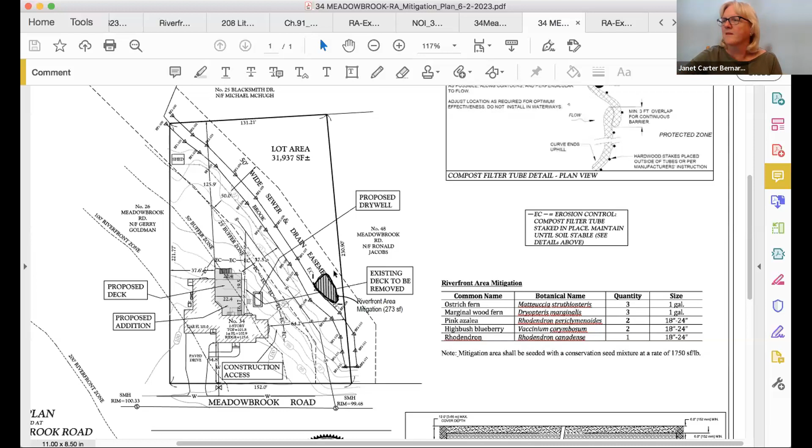May I share my screen? Yes, you may. This is a continued notice of intent, by the way. Okay. Can you see that? I'm not always good at these things. Oh, I have to move you guys over. Everybody else can probably see and I can't. Is it on the screen? It is. Okay, it just took me a minute. That's that part.

I'm Susan McArthur from McArthur Environmental Consulting, and I'm here with Brett Reese, the homeowner and applicant for 34 Meadowbrook Road. At the last commission hearing, the commission had requested that we provide riverfront area mitigation for the proposed impacts to the riverfront.

So we've come up with a mitigation area. It is located on the opposite side of the brook. It is a grassy area with just some fringe shrubs and whatnot. It's 273 square feet, and we're proposing 3 ostrich fern, 3 marginal wood fern, 2 pink azalea, 2 high bush blueberry, and 1 rhododendron. It's a little shady over there, gets a little bit of sun, but we think those will do fine in that area. Prior to installing that, we're proposing just an erosion control barrier because it's close to the edge of the brook.

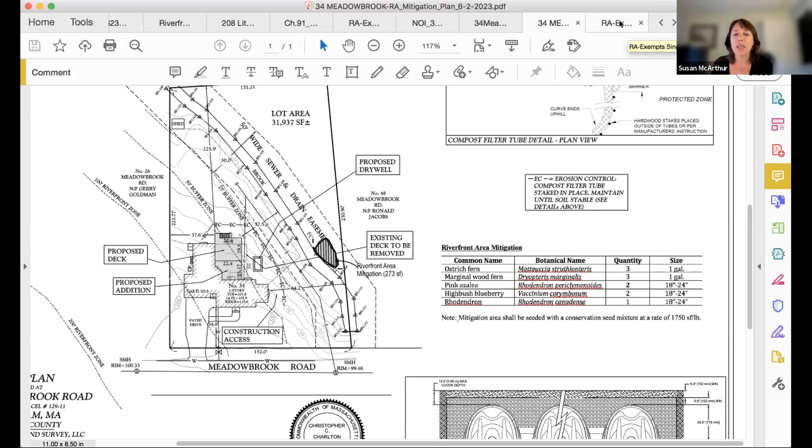So I just wanted to make the point that it's only 35 additional square feet of new area in the riverfront. I know you all attended a workshop with the DEP, but I think something's a little, well, we're doing the mitigation.

Don't get me wrong, but I'm just pointing that out, that I think maybe the way it's interpreted is different. I also wanted to show you this memo I found from the DEP, which I highlighted. It's about the Rivers Protection Act, and it does say existing structures such as single-family homes and accessory uses are exempt from the Rivers Protection Act. So I'm just pointing it out to you. You might want to talk to Alicia.

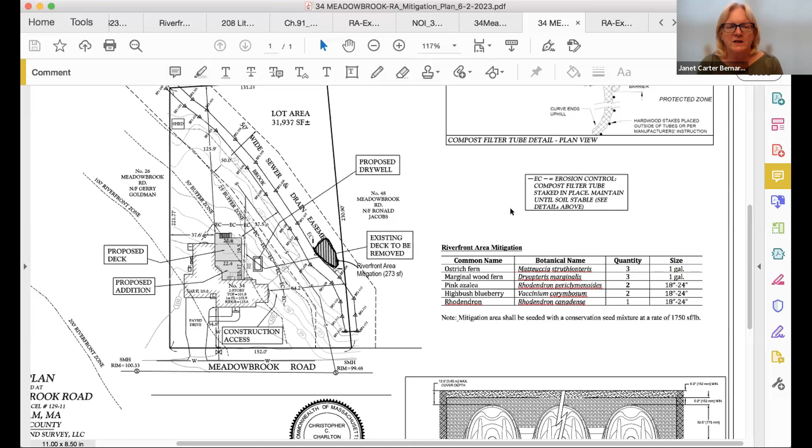Yeah, we did. We actually had an email with her that backs up what we're saying. Thank you, and we will keep that in mind because there are others on this call who have had the same question. We've gone back and forth with DEP a number of times at this stage, because every meeting we have the same conversation with, not you, but others as well. So we hear you, and this is what we're being told. We appreciate you providing the mitigation, and we also really appreciate that you're outside of the 25-foot buffer zone. I'm just pointing that out because there are others coming right behind you that may not be.

Okay, so do we need anything else for this application? Are we ready to close the hearing? If so, I'll take a motion.

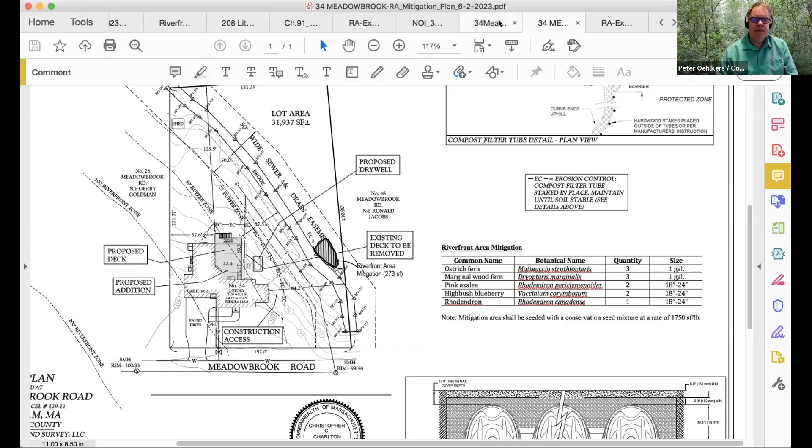I move we close the hearing. Second. All in favor: Peter, aye. Allison, aye. David, aye. Sue, aye. Great, thank you very much.

I think we will be discussing the order of conditions for that later on this evening. Okay, thank you very much.

So now we're moving on to 46, 50, 62, 94 Heather Lane, MWRA Siphon Structure Project, DEP file number 234903. This is also a continued notice of intent.

Who do we have to talk about that? Good evening, Milan Horbaczewski, MWRA, and we also have Mike Cunningham with Kleinfelder. Thanks for having us back tonight. Yes, this is the continuance of basically a discussion on our existing easement running through the back of those properties.

Thank you to Deb for getting some additional contact information for us. I had a conversation with Simeon Bruner of Bruner Cott, which is the property owner at 46, and was able to discuss with him the project and what it is that we intend. I also shared with him the drawings so he has a good feel for what we're doing there. He's not interested in any additional trees being planted on his property. So I think at this point we've exhausted the ability to plant in that area on private property, outside of our easement.

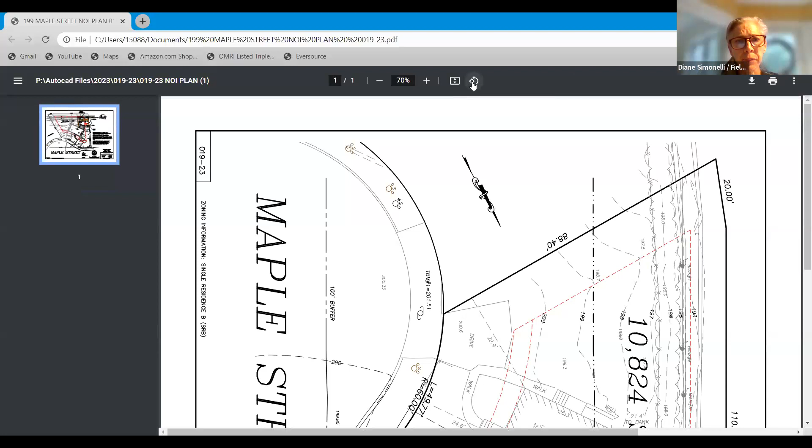Again, the wetlands were delineated by Karen. It's an armored drainage ditch. I don't know if you can see it, but the armored bank is here. There is an existing fence that has some vegetation between the fence and the armored bank.

And currently it's all lawn on the upland side of the fence with an existing shed that's currently within the 25. I know there's been some concern about work in the 25, but this particular lot is unique in that it is a two-family.

I know the lot itself is 10,824 square feet, but exclusive use for this particular lot is only 5,140 square feet. So the lot itself for this homeowner is very tricky to work with, in the sense that this red dotted line is the building envelope for the lot.

Again, they have a sunroom. It's going to be sitting on sonotubes, and technically the only portion of the work that will be in the 25 is one sonotube, which would be in this corner. The proposed project does include removing the shed and replacing it outside of the 25.

So technically, in this particular project, we are reducing structure within the 25. The calculations we did are based on the structure, but technically it's only one sonotube that will have disturbance within the 25-foot no disturb. So technically, I believe we're reducing - let me just slide this over a little bit more.

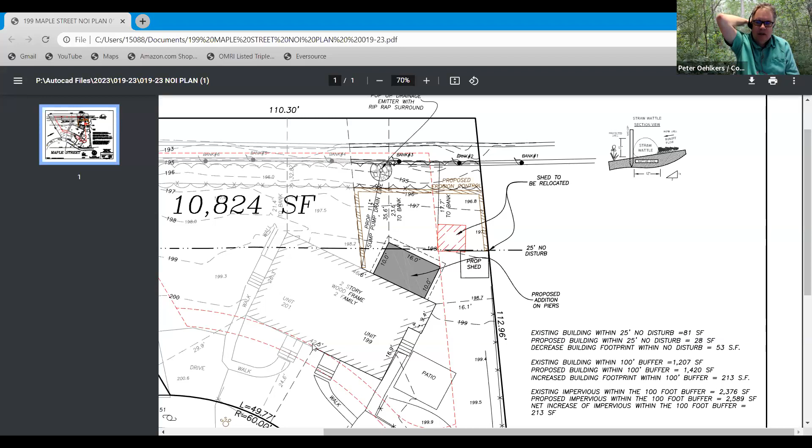I echo Peter's comment. But I have another comment about this drainage line. That's construction in the 25-foot zone, and I don't think that's allowed by our regulations.

Secondly, there's no drainage shown from this addition. My understanding of our regulations is that...

It should be infiltrated on site, no matter what size it is. It doesn't fall under the Needham stormwater bylaw, but our regulations do say that stormwater, or runoff from any new impervious area, should be infiltrated on site.

So this appears to be like a covered deck type of structure—it's a 1-story structure, right? Correct, yes. And again, the reason for not infiltrating is because of the groundwater—basically you'd just be circulating the groundwater.

It's going from the roof runoff into an infiltration system, which we could easily do, but it would just get pumped back out by the sump pump. So it's just a constant cycle, and that's what we're trying to help the homeowners with—a wet basement.

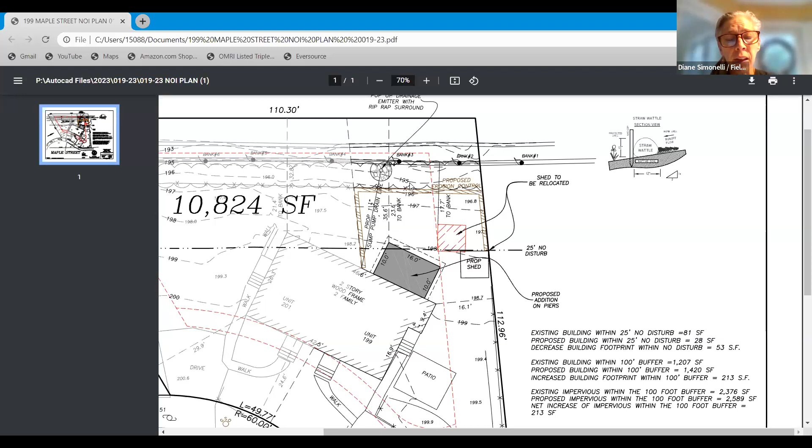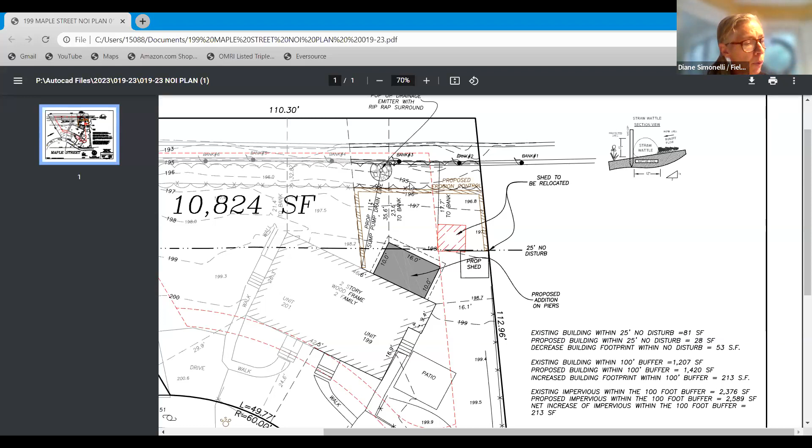So that is also in the packet—let me just grab that. Again, trying to increase the natural habitat of vegetation in that area, though we don't want to propose any plantings until we get a handle on the invasives that are currently there.

You're not taking any trees down though, right? No, no trees are being removed. So we have some buckthorn, bittersweet, jewelweed, and multiflora rose that we'll be removing—I'm sure that will surprise you, the jewelweed.

That seems—is that an invasive, Allison? Yes. Oh, I think it's kind of pretty. It's good for poison ivy. Jewelweed? Oh yeah, you rub the sap on your skin. Nothing likes it better—it likes a wet place.

Yeah, but I thought it was just a wetland plant—I didn't think it was an invasive wetland plant. It grows like wildfire. I don't know what you call invasive, you know—one person's diamond is another person's piece of glass.

Whenever I see that, I know it's a wetland. Yeah, me too—that's one of my things that I know. One of your go-tos. One of my go-tos.

Allison, you have—oh, Dave, are you finished? Yeah, okay. Allison? Yeah, I had some questions. I had the same questions about digging in the 25, even if it's one, you know...

...footing, or sonotube—it's still in the corner of the deck, it's still in the 25, and also the pipe. But I'm trying to understand when you're talking about how this wall stops the groundwater from moving down. So my question is, what is the elevation of the basement?

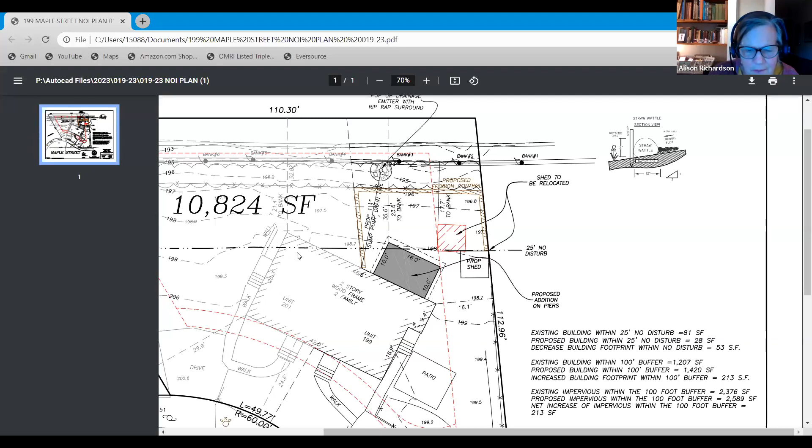I don't have that elevation. We didn't get the elevation, but it seems like the elevation is about 200, going around the building at the front. And the elevation inside looks like it's around 200 as well.

And the elevation in the stream, the armored stream, is like 193. So this 194 is the top of the wall. Oh, at the top of the wall. Okay, yeah, it's easily 2 to 3 feet—easily 3 feet. So I was wondering if this is maintained by the town, right?

If it really is holding back the groundwater, I don't know. But if it is, why couldn't one drill some weep holes through the wall to allow the groundwater to seep into the channel? I'm just talking about something very simple.

If that's really a problem, that might help. We actually thought about that for the sump pump too, but we weren't sure if that would be allowed. I don't know if it would weaken the wall.

I'm just talking about a few weeps, like 8 feet on center, down below wherever it seems to be backing up to. The best thing would be to have it above the water level, but even below that might help.

If this is a town structure affecting the basement of this house, it seems to me one could go to the town and have a trench drain or figure out what could make the situation better without drilling through the wetland and putting drainage structures in.

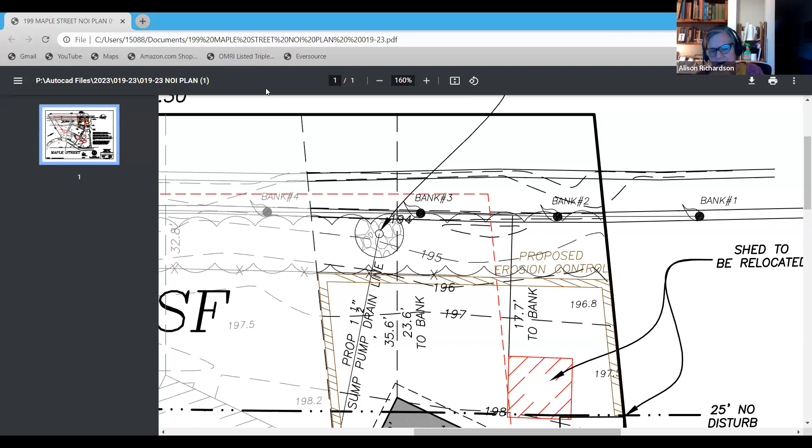I'm not just saying it from the point of view of a conservation commissioner, but if you really have water in your basement, there may be multiple ways to head it off rather than just having a sump pump. Well, currently they do have a sump pump.

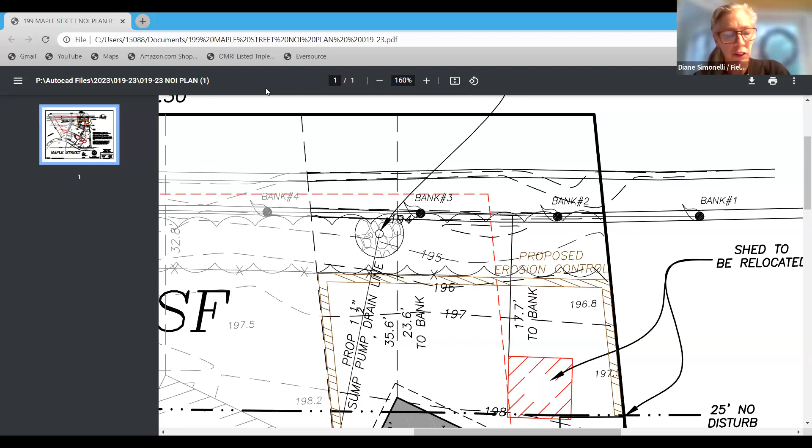Where does the sump pump go right now? Honestly, I'm not sure — do you guys know where the pump actually discharges? There's a discharge right now; the sump pump pipe discharges onto the lawn in the back.

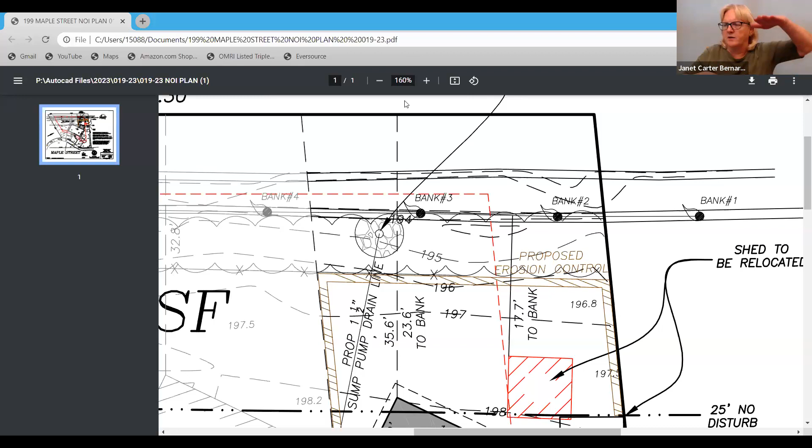It comes out right in the lawn, comes out from here on the house. I'm not sure — is that for both parts of the house or just the part we're talking about? What about the neighbor — do they have water in their basement too?

Yes, they do. They have a sump pump also — they have their own.

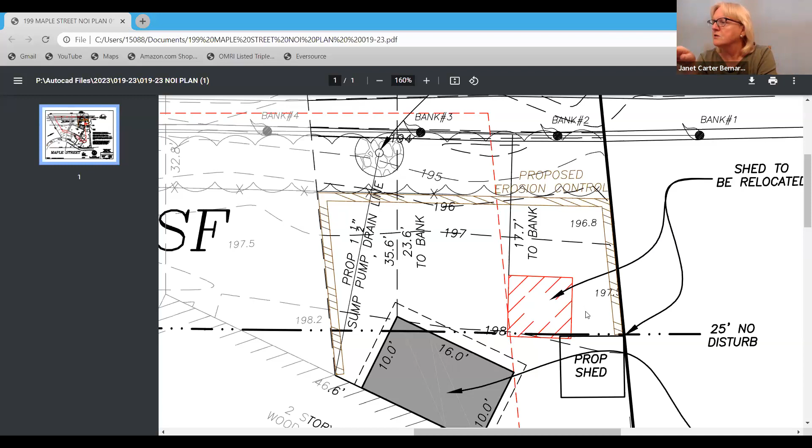Sue, did we get to you? No, actually, I do have a couple questions.

First of all, it looks like the sunroom you could pull back, so it's outside of the 25 foot. It looks like there's space on the existing house where you could pull it back outside of the 25 foot. I don't like to see it in the 25 foot.

That's number one. Number two, I am all for something in an infiltration system nearby the house for the new sunroom addition roof runoff. Third question is, if all this water is being drained back to the drainage ditch, what happens to the water level of the neighbors?

Well, this does flow into a culvert to the pond. It doesn't go to a specific neighbor per se. It's actually culverted, the house to the right of us, if you would. On their property, I believe it culverts right there, so it goes underground. How deep is this drainage ditch?

The top of the wall is about 3 feet higher than the bottom. It's concrete, basically like a three-sided box. Is the top of the wall flush with the ground? Pretty much, maybe an inch or two lower. So if it's 194, then the bottom of the channel should be around 190.

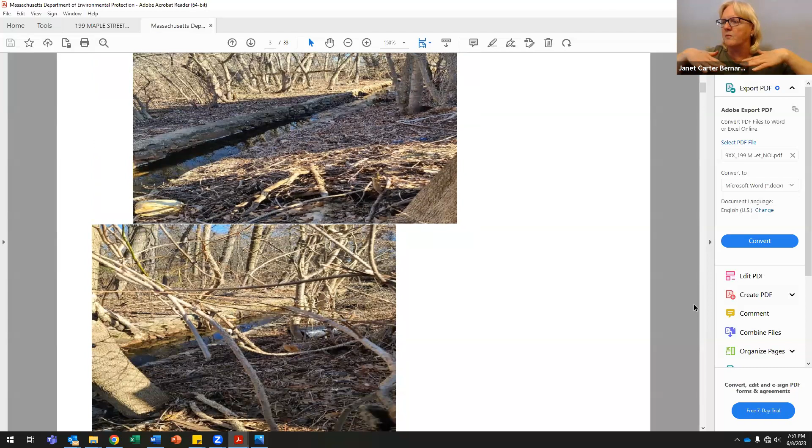The DPW just did some maintenance on this. Is this an area they did maintenance on? I don't believe so, this is behind the housing on the other side. This isn't behind the house at 199? Yeah, they did do maintenance over there last summer, we walked around and they cleared a bunch of areas, cleared some of the tree roots and saplings that were right on the wall because they didn't want them to interfere with the structural stability of the wall. Mike Redsky was part of that project as well as Tom Ryder, but they are the ones maybe to have the discussion with.

I'm also wondering, does it make more sense, instead of having your bubbler, to have the pipe just go right over the wall into the area, so you're not digging anything up.

For the stormwater management of the addition, would you consider a rain garden? It doesn't have to be deep, it just has to be a surface area, a small depression that you plant some flowers in and make a nice little rain garden out of. So it doesn't have to be a subsurface chamber system, it can just be a flower garden. I know the homeowners have a green thumb, so that's something we can discuss. They do a great job on the side of the house, it's beautiful, and in the front too.

And our rain garden is beautiful, do we still have that on the website, Deb? Where did Deb go? There's a neighbor on Great Plain Avenue that came in front of us because they were putting an addition on, and they could have put a subsurface chamber system in the front of the house, but they didn't want to dig up their flowers, so they ended up putting a good sized rain garden on one side, and she documented it for us.

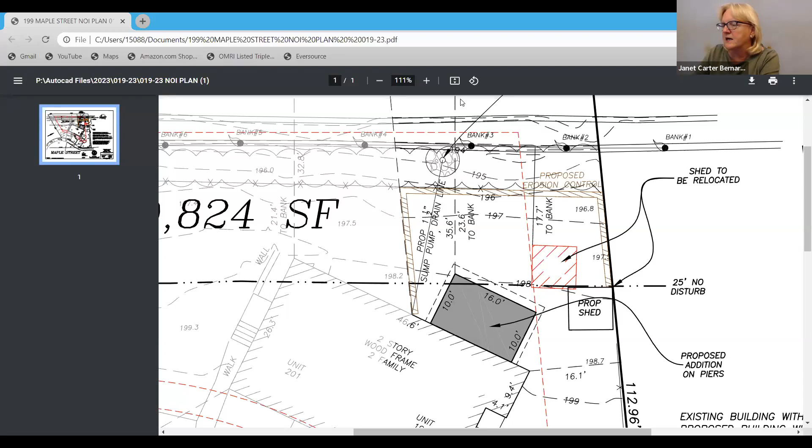Okay, so we're looking for an extension for DP, continuation of DP file number 234907, to June 22nd, 2023 at 7 p.m. Can I have a motion?

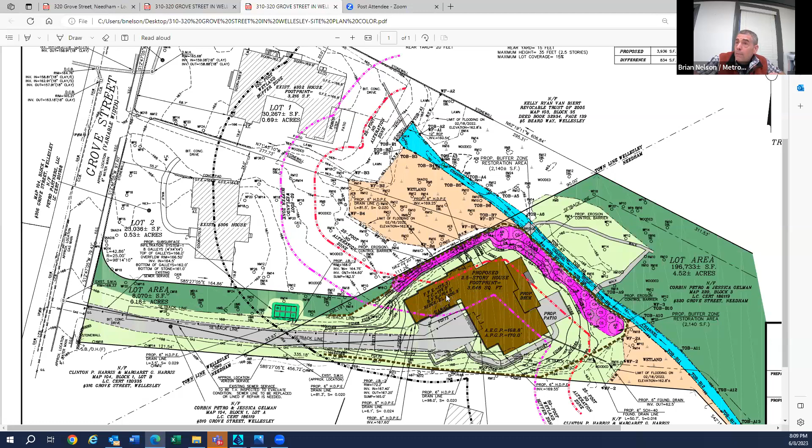But I would like to highlight some numbers - we go up to this table in the top right-hand corner. This is a table that we prepared just to show coverage within the resource areas. For the 25-foot, or what I'll call the no-disturb zone, existing impervious coverage of 2276 square feet, proposed that reduces down to 350 square feet. So it's a 1,900 square foot reduction, which is about 85%. Also looking at a 719 square foot reduction of impervious area within that 50-foot buffer zone, which is a 21% reduction.

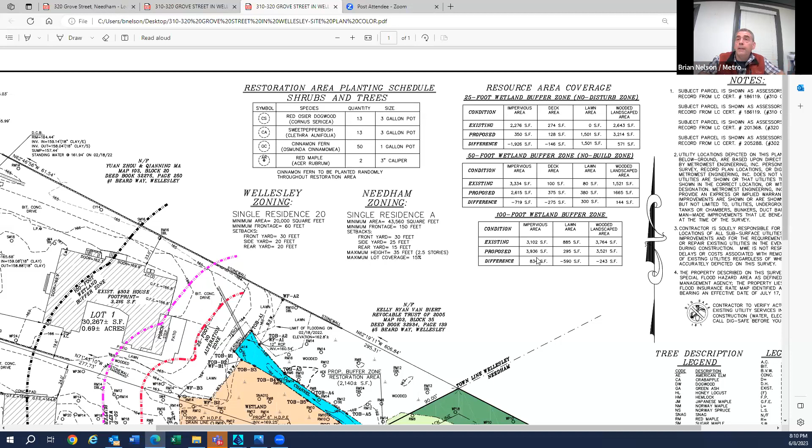We do have a slight increase in the coverage in the 100-foot buffer zone, and there is overall a reduction in impervious area of about 1,500 square feet. So we feel like we're doing the best we can to work within the confines of the lot, again constrained by a setback along the northerly side, which this new house is basically hugging. And it's hugging the southerly setback here. Again, that house has been pulled as far south-southwest as possible and rotated.

So the house floor elevation and foundation will be raised about 3 feet in comparison to the existing. Again, that's with the intent of trying to really make the house less flood prone, as the site is frequently inundated by floodwaters.

For stormwater, we have a proposed infiltration system that actually crosses over the town line, but we can tuck it in off the northerly side of the driveway over here. Again, just trying to get a system in that will capture and infiltrate roof runoff, and not really crowd the area out back - trying to keep that as far away from the 25 and 50 foot buffer zones respectively.

So the project will provide a stormwater management system. The project will significantly reduce impervious area within that 25 foot and within the 50 foot buffer zones.

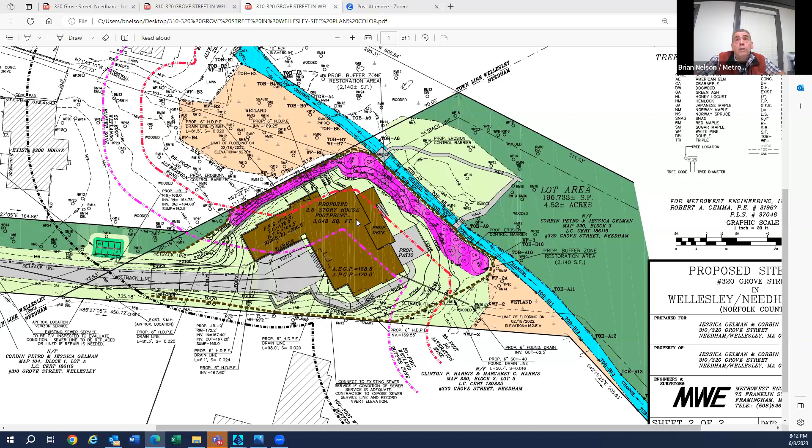And we feel that this house will allow the applicants to be able to live with a lot greater peace of mind in terms of being a little bit higher in elevation and away from that chronic flooding. What I'd like to do just before I turn it over to Corbin is show you a couple pictures of that backyard flooding.

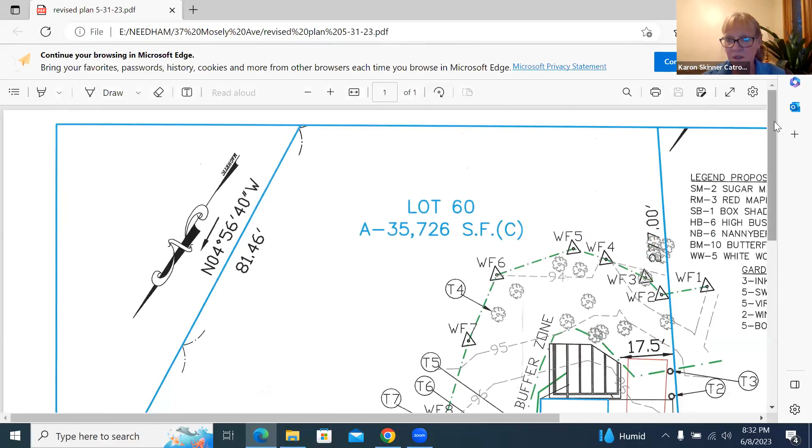So, revised, these are all the revisions we've had for this, okay, 5/31/23. This is the tree plan. This shows the colored version of the different additions that are going to be added, the plants, and the description of how the trees will be handled. We've pretty much covered all of that. Can you guys see that? It's not the whole screen, can you make it the whole screen? All right, here we go. So I kept looking back through the plans. Did the tree plan get in the package? This is the tree plan, and this was in our package, right? Everybody has seen this plan, I forgot to specifically look for this one. So this was revised as a colored plan, and we met with myself, Daniel, Mikhail, Janet, and Deb to discuss the calculations. There was some question about the calculations. Is everybody satisfied with that at this point? I believe we are satisfied with the calculation.

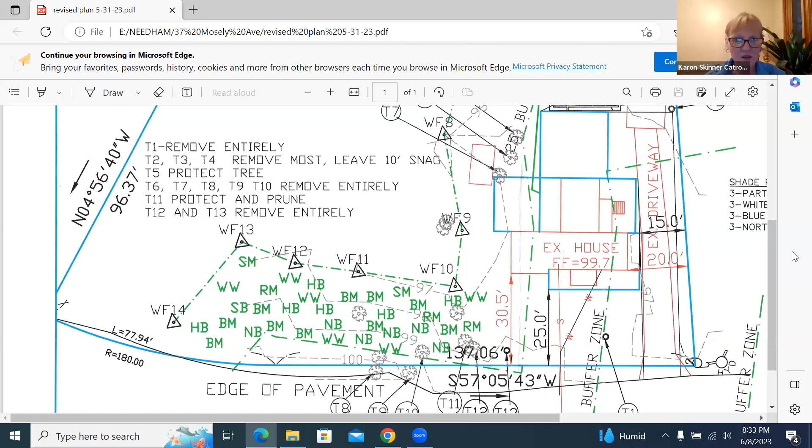Okay, so the other outstanding issue was the deck. The deck within the 25 is the only thing that we have now within the 25 foot zone. So they're proposing to construct a 10 by 15, or 15 by 18 deck, is that right? And it's coming out of, off of the 25 foot, it's within the 25 foot not-disturbed zone. So we have already discussed helical piers, so there'd be 2 helical piers within the 25. There'll be slots between so water can flow through. We did propose some plantings underneath the deck, shade tolerant ones. And the deck, is it going to be somewhere like 5 feet above the ground surface? I believe we did discuss that. Daniel, feel free to chime in. That all sounds correct, yes.

Okay, so those are really the only outstanding issues. Just to make sure it's very clear, you have an existing house that's within the 25 foot no-disturb zone that we are allowing you to keep, because you have said that is the intention. The other project was fully removing their house, totally outside of the 25 foot zone, so we're asking them to fully remove it. We don't expect this foundation to come down. This foundation needs to stay there. It doesn't get to come down.

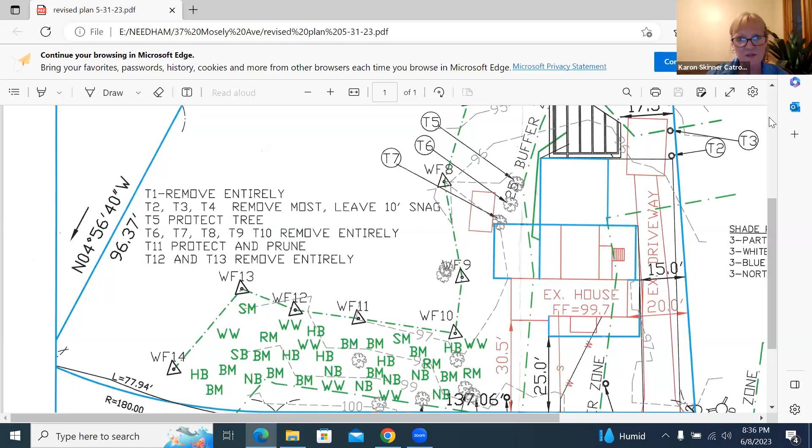Do you have a detail sheet? Clay, do you have a picture of that? I don't have that picture. I emailed all the photos directly to the Conservation Commission, along with the detail sheet, and the detail sheet was part of the plans, correct? That was part of the package. So what we're looking for is the soil detail on the plans, the sheet that has the details. It'll be sheet 6 of 9. Got it.

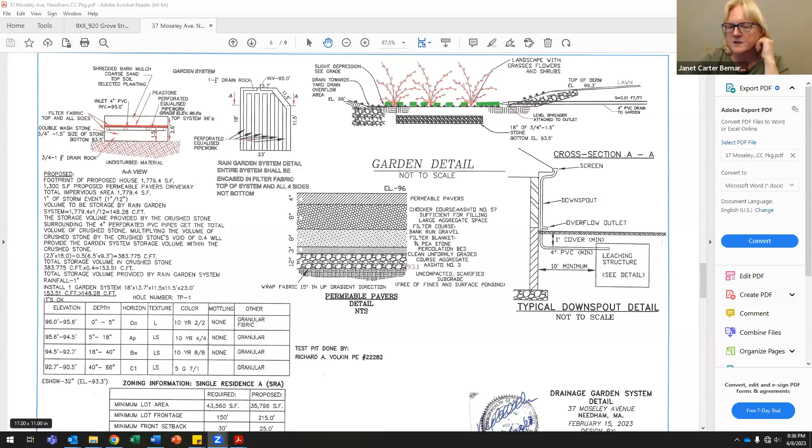So this is what the rain garden will look like now, for anybody in the audience paying attention. There is stone beneath the rain garden, shown at the top of this page with the flowers coming out of it. There's stone below, and 4-inch perforated pipes that run through the whole thing to divide up the water, like equalizing pipes. Then there'll be a compost topsoil mix on top of the pipes and crushed stone, and the plants will be planted in there. There was a planting guideline along the way. The water from the house will go into the pipes and be dispersed through the stone, feeding the garden flowers and plants above it. So it becomes a rain garden.

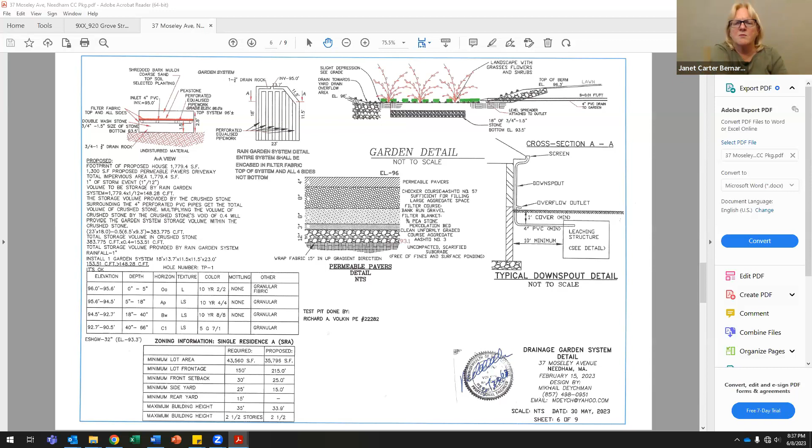So we had requested a clearer detail, which was understood, revising some numbers to make sure they all matched as they were supposed to. They were also going to provide a photograph of what this rain garden might look like, because there's also some stones, right? A slight depression that drains toward the yard, a landscape with grasses, flowers, and shrubs. Are those green stones, or are there also some stones going to be on top of this, I believe? Clay, do you see some photographs you could share?

Let me take a look. I apologize, there's a lot of materials to go through.

You actually did not send us the photographs. I did not, I never received the photographs, I just saw them in the office. I think they were part of that, weren't they, Daniel? I thought they were going to be, but looking at our package from June 8th, I do not have photographs in it. But I thought that was the idea, that they were sending them to you. They were definitely part of that email that I sent, there were 2 photos included in the body of the email.

Yeah, I've got them here. Just a moment while I pull those up.

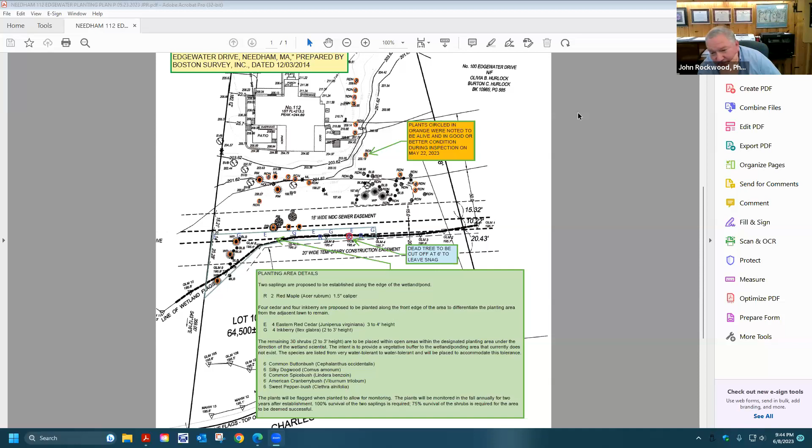Okay, now we only have 1191 Greendale Avenue, DEP file number 2347749. This is a request for certificate of compliance, and I believe you said it was in good shape. Yes, for Saint Sebastian's. I've been out there 2 million times and everything is good, so I would issue a complete.

Anybody have anything to add, or are we ready to issue a certificate of compliance for DEP file number 2347749? I'll take a motion from anybody. So moved. Did I get a second? A second. Okay, all in favor - Peter, aye. Dave, aye. Sue, aye. Allison, aye. Great, thank you very much, then we issued that.

I think the only thing left is to discuss an order of conditions for 34 Meadowbrook Road. Is that true? Okay, and also there were minutes - I don't know if anybody looked at those. Well, I didn't. I did. Are they in the packet? Yeah. How many minutes are there? Two.